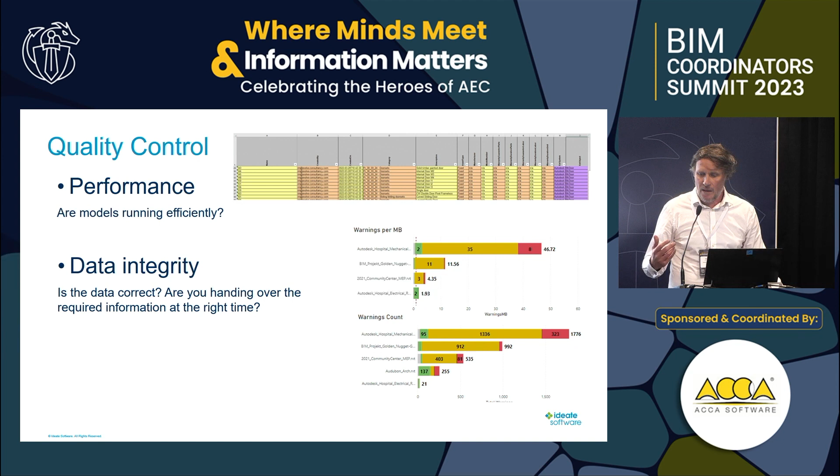So quality control, what we're looking at, I think we can define this into three specific areas really. So once we're looking at performance, are your models running efficiently? Are they delivering the work you need to deliver on time? Data integrity, now this is the important one for me. Are you delivering the correct data at the right time to your clients? And then finally, productivity. Are your users being productive? Are they producing the work they need to deliver on time, on budget, without overruns, etc.

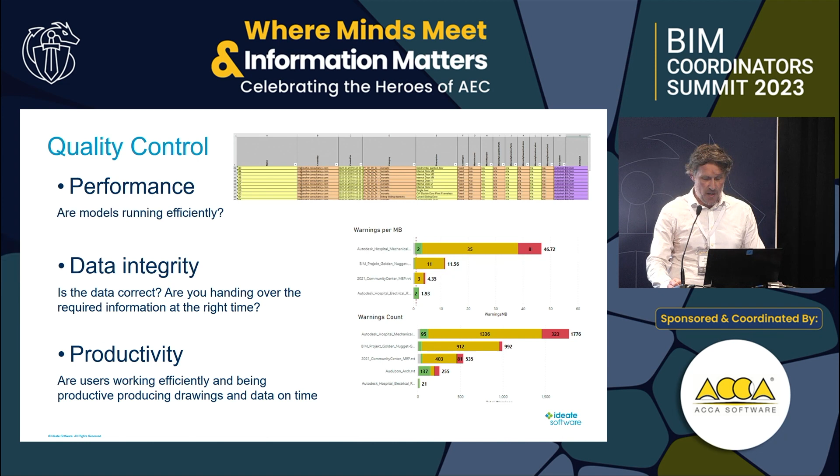So we can break these down into other areas here. So productivity, performance, what are we talking about here? We want to prevent issues with your models. We want your models to run as smooth as possible. You don't want your models crashing on a regular basis. That causes lots of delays, wasted time, even rework, etc. Do you want problems with saving your models? That's another issue. You don't want problems saving your data.

Printing and exporting, you do not want, when you come to print those drawings or produce those PDFs at the end of your project, issues there. And there's other issues that we can see on the board there. So incorrect data is the key one, as I mentioned before. You have got to make sure that the data you're promising to deliver is what you are delivering. So the goal here is we want to keep the project team and your project stakeholders happy.

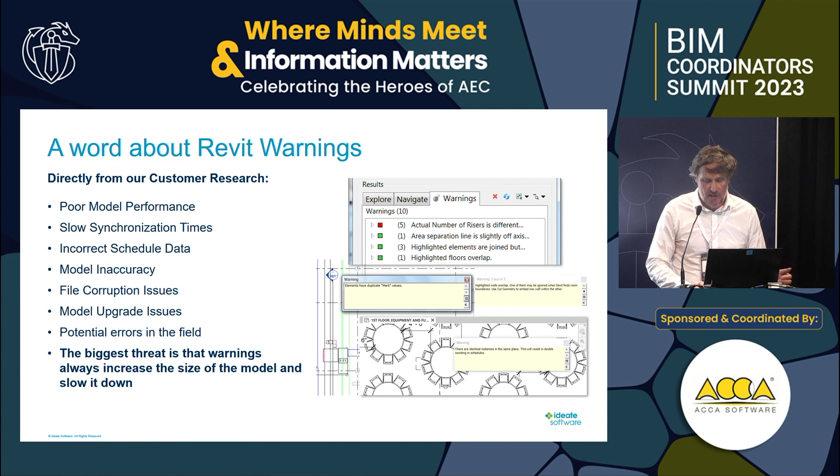So if you're ordering too many doors because your schedule from Revit is telling you need 300, but you only need 200, that's increased costs for materials, and it's also leading to waste as well. So if your scheduling is incorrect, that can lead to issues with site materials, etc.

And then I've put this one in, site safety. We know a lot of site inductions now have taken place virtually with a 3D model or one of those BIM caves, whatever they call them. If that model's wrong, then there's a potential for safety issues on site. So if that model is incorrect, that could also be a problem.

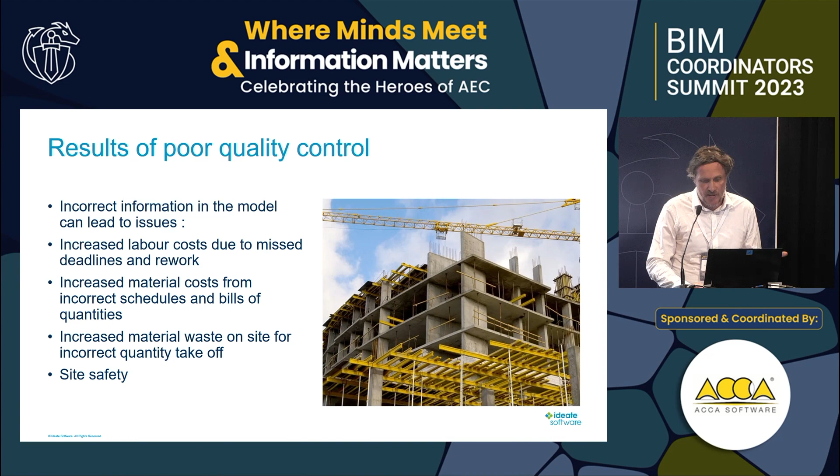So this is the data governance stage. So what's this got to do with data governance? Well, everything really. If your model doesn't contain the correct data, then you're going to be handing over incorrect data to your client at the end of the process. So how are you checking your information requirements? What are you doing to make sure that the information you deliver is what your client expects and requires?

So Ideate software, we've developed a suite of applications, and a lot of our tools can help with some of these issues around quality control. So I'm going to give you just one or two examples of how our tools can help with some of these processes.

So Ideate BIM Link is a solution to help you manage all of that data in your Revit files. You can export the data into Excel, which makes the process much easier for editing, managing that information, push that information back into your model, and it will update your model.

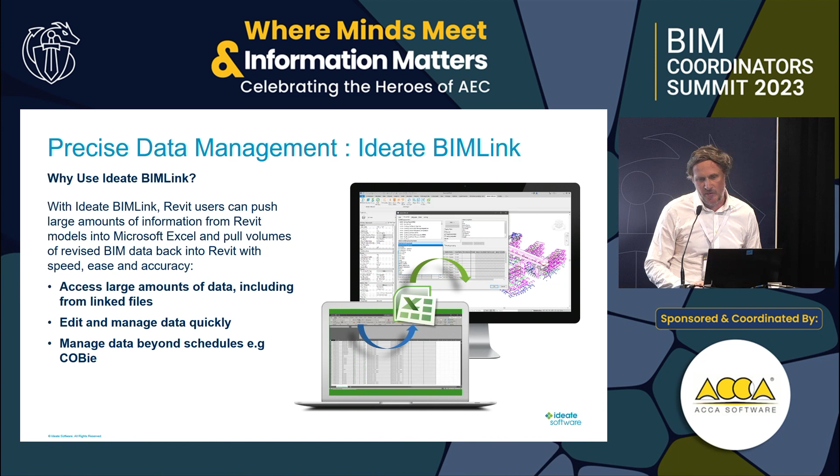One example of that is we have lots of pre-configured content, and we have content specifically for quality control. So this is checking naming conventions, it's checking standards, work sets, type names, you name it. There's a whole host of pre-configured content that we provide with our software to really help you make sure your models are correct and working to the best of their ability.

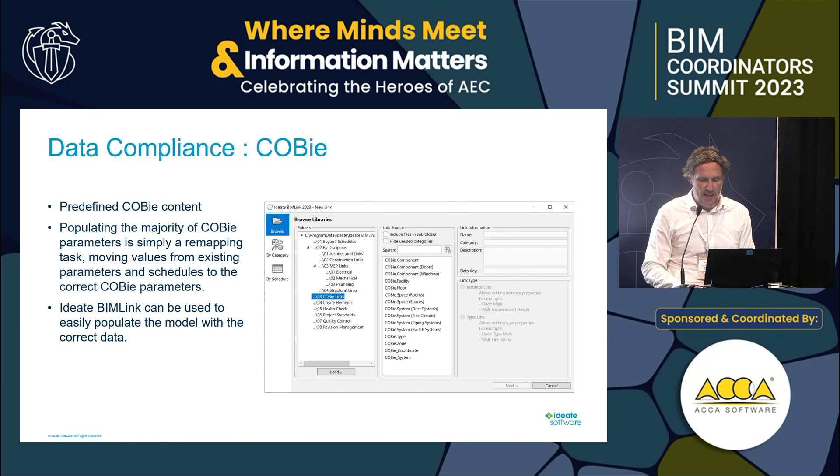And then COBie is obviously a key deliverable, especially with the ISO 19650. So again, we have got content to help you to manage this process. The vast majority of COBie deliverables, it's a mapping exercise—it's filling in properties in Excel spreadsheets, copying and pasting data from one cell to another, and then pushing that information back into your Revit model.

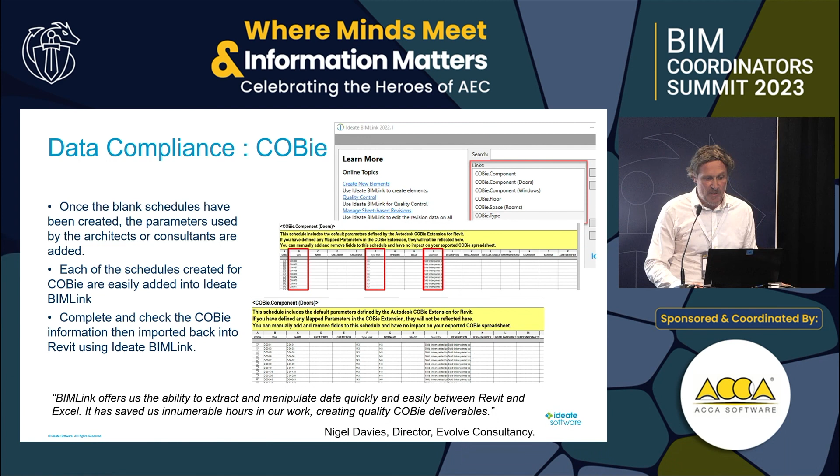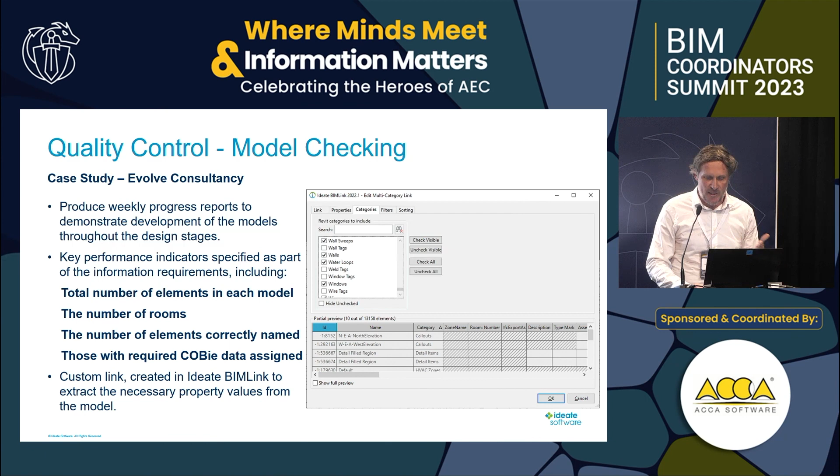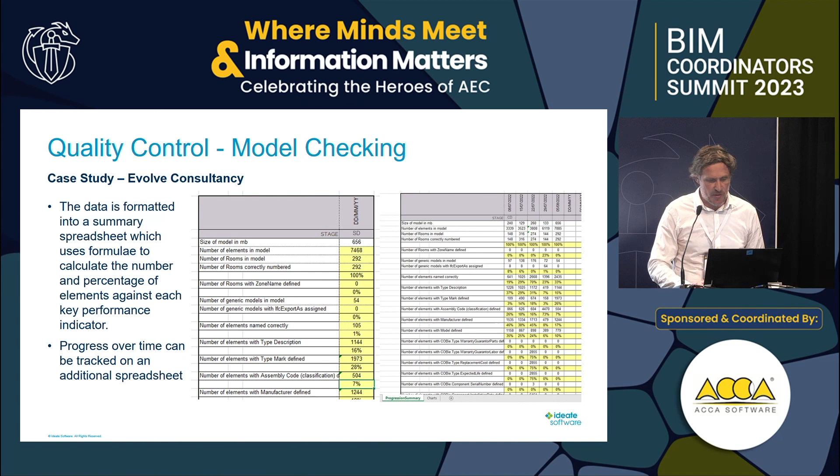So this is, again, from Evolve Consultancy. They were working on a project where they were asked to check the model performance and track the performance of those models throughout the delivery cycle of the process. So it's finding out key information like the number of rooms, are things being named correctly, is COBie being assigned to the projects. So once again, using BIMLink to extract the information from Revit and then manipulating that data within Excel, we provided a solution for them that helped them to track the progress of these models throughout the project lifecycle.

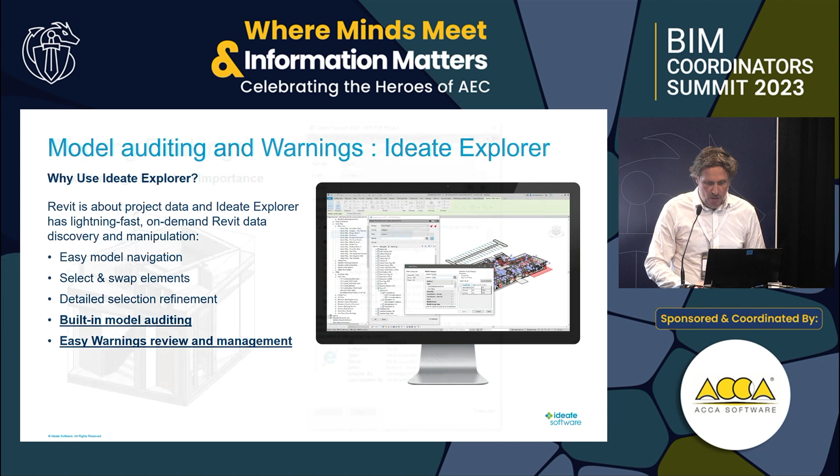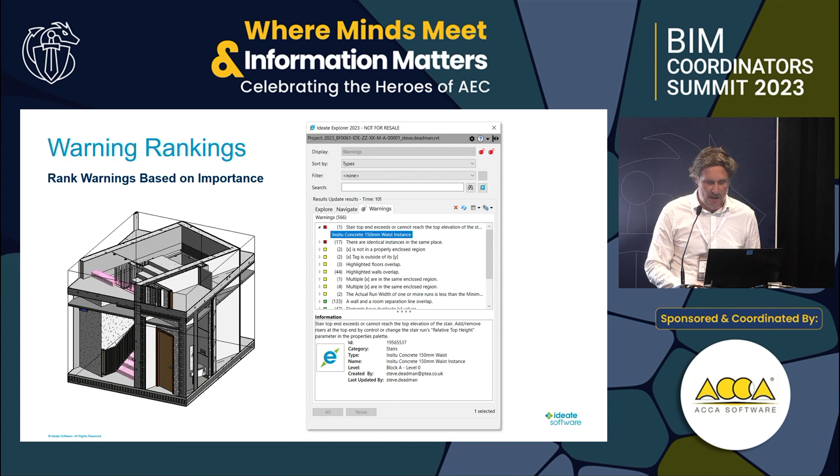So I mentioned warnings. Another one of our solutions, Ideate Explorer, has a built-in warning manager. This helps you determine which warnings are more important for you to deal with, rather than just having a long list of warnings that Revit gives you. We characterize these by how these warnings will affect the performance of your model, so this gives you an idea of how to track those warnings and resolve the ones which are more important. That's a solution we developed there.

Style Manager is a tool to help you manage the myriad of other data, so things like line styles, materials, line patterns, etc. These kinds of elements are very time-consuming to manage, or often impossible. With the Ideate Style Manager tool, we've given you the ability to analyze this data and then remove the unwanted styles and even merge similar styles together to make sure you can align with your project and BIM standards.

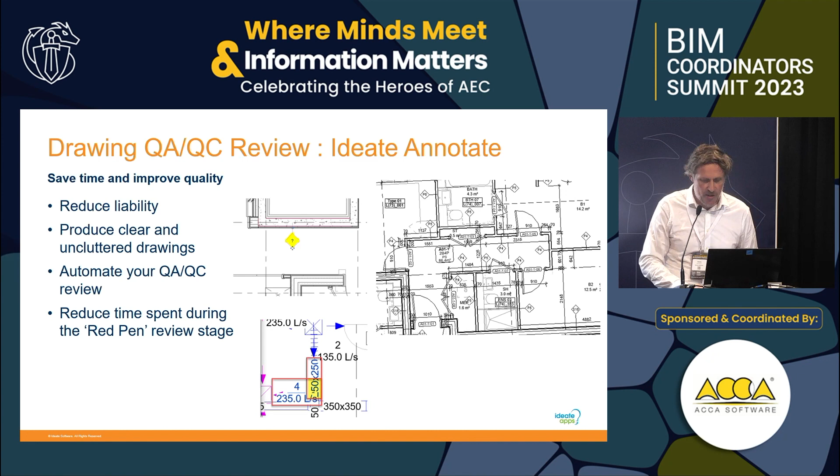And then finally, we have another solution here called Ideate Annotate. This is a tool that really does help with that QA, QC review of your project documents. You can run this solution and it will highlight issues with your document. It's that red pen stage, as I call it, where reviews are being done and project leads go around with a red pen marking up all these problems with your drawings. We can automate that process with Ideate Annotate, and it will help you resolve quickly any issues that the tool can highlight. These are some of the conditions that Ideate Annotate can pick up: 0-length dimensions, blank tags, duplicate tags, etc.

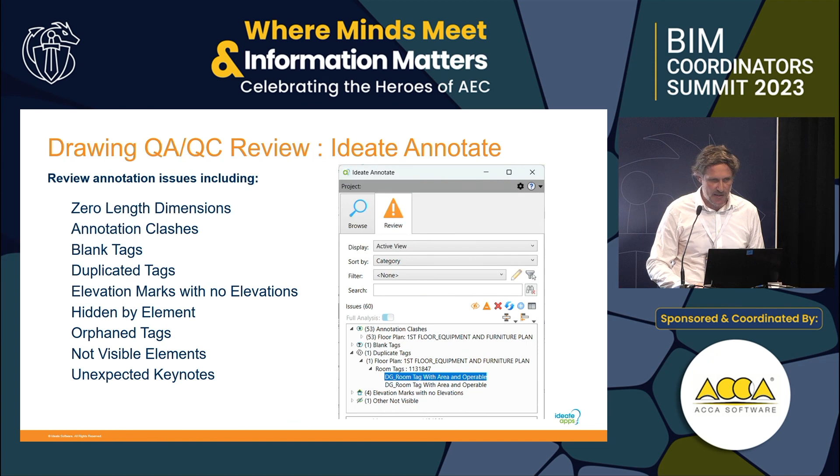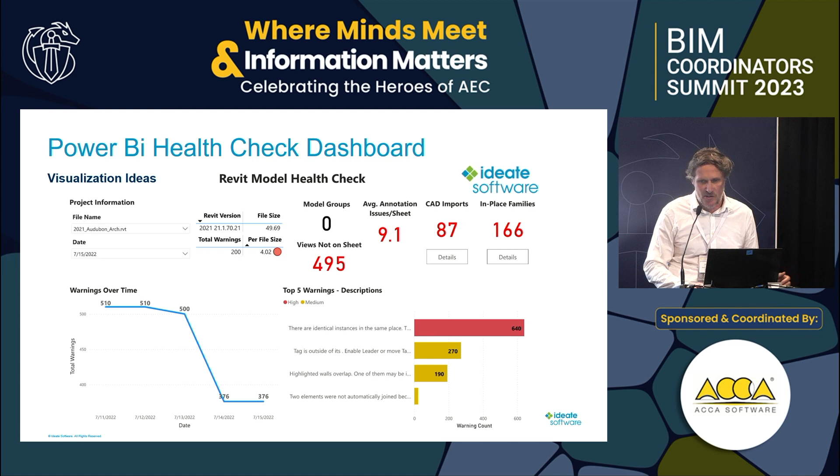And then finally, we have another solution to help automate these things further. Ideate Automation will enable you to schedule specific tasks, whether it's extracting data from your models, managing COBie information, creating PDFs and DWGs. We have another solution there to help with that process. That's just an example of some of the data that we can extract from these models to build a health check report. And who doesn't love a dashboard? We can push this information into a Power BI dashboard as well, so this process can be automated and scheduled, so you're extracting this information on a regular basis.

Model maintenance and quality is every team member's responsibility. Don't leave it to your BIM manager. It's everyone's responsibility to make sure that your models are performing correctly and the data that you are delivering from your models is correct and accurate. And hopefully with some of the Ideate software solutions, this should make that process easier and quicker for you.

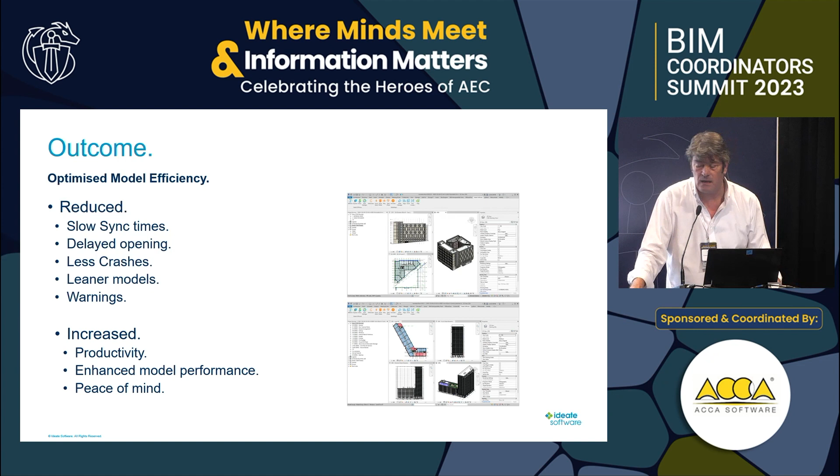However, if you've got all those things in balance and harmony, the outcome of that should be an optimized model efficiency. You shouldn't suffer from slow sync times, delayed openings, crashes. You should have leaner models, you should have fewer warnings, and that gives you increased productivity, enhanced model performance, and peace of mind within the company. The users get peace of mind that, I'm working on XYZ project today, I hope it doesn't crash.

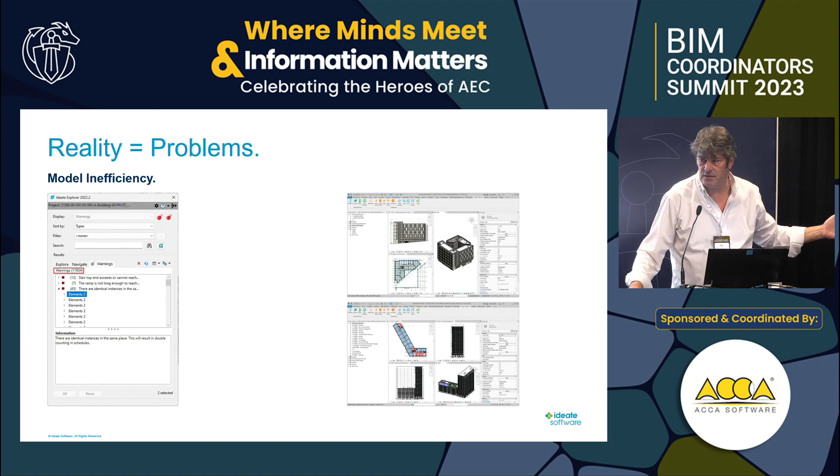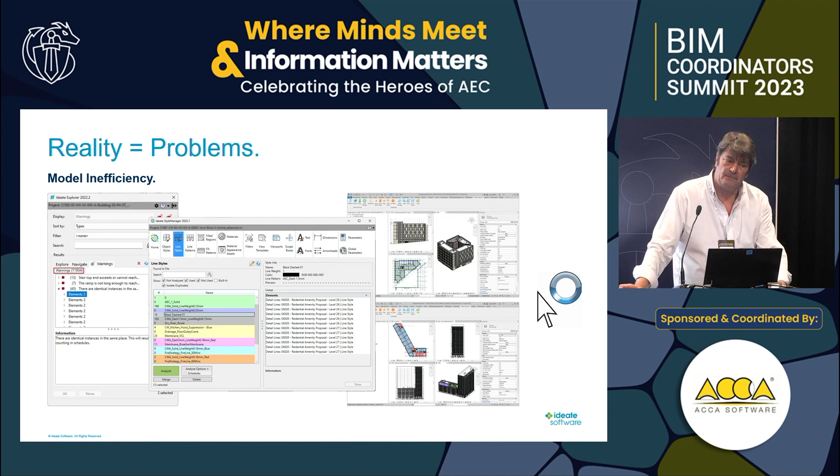You shouldn't have that many, or you're going to suffer from problems. If you're importing DWG or CAD data into your files, you're going to get more line styles, more patterns. All these things can result in the spinning blue donut of death.

What are the culprits of that? It doesn't matter how much time you give, you take people through mentoring processes and teach them model maintenance, there are things outside their scope that don't help. One of those things is deadlines. In today's environment, our deadlines are getting more and more compressed, the same amount of work, sometimes more, in a shorter space of time.

There's two ways you can handle that. You can throw more resource at it, which means you lose more money, or you can charge more money, in which case the client says we're not paying any more for it. That gives a compression on time, which affects the person doing the work.

And this person ends up spending hours and hours. To reduce the amount of hours they take, what do they do? I hate to say it, they'll take shortcuts. They'll do anything to get that package out on time.

And that is why we need Ideate, to make sure our models are well maintained. We bought the whole suite. I'd used it previously in other organizations to create success. In fact, there's one project I couldn't have completed without BIMLink for import and export of data.

It gives us a whole host of quick wins. With Ideate Explorer, it's like the Revit Project Explorer, but it's been on an Arnold Schwarzenegger course. It's a really beefy Explorer that lets you do a lot and optimize your models. It improves your audits, your QA.

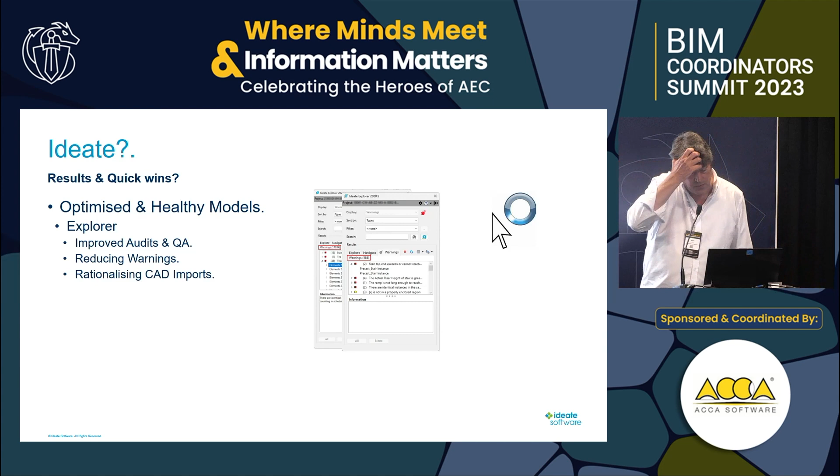You can reduce the warnings, you can see where those warnings are, you can rationalize your CAD imports. It just makes things better. There's that example I showed earlier on the first run through Explorer, where we reduced the warnings by over half in a very short space of time.

StyleManager has been absolutely invaluable for us. It's allowed us to do a lot of consolidation on some of our models and reduce line styles, patterns, text fonts. Does it matter that I've got all these line styles in a model file? Yeah, it does. They don't take up a lot of space, but they do take up space and cause confusion, and it's better to get rid of them.

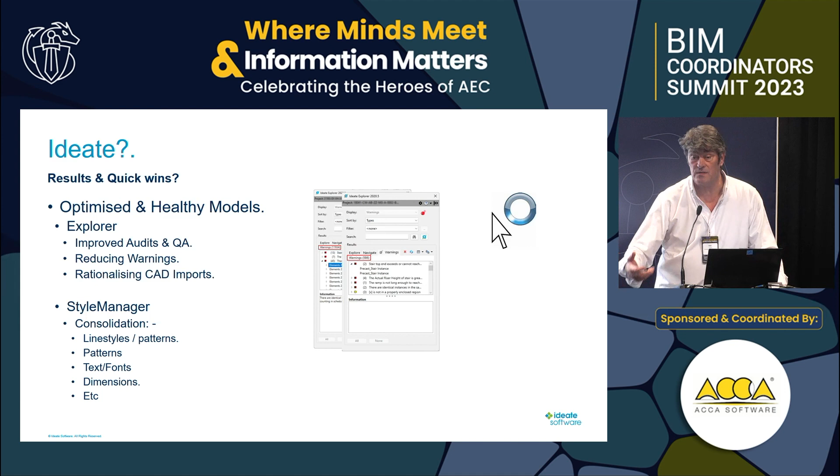It's going back to the old days of CAD when you deleted duplicates, people drew lines on top of lines. You've got to delete those lines because it keeps those files slim and efficient.

We've done some rudimentary analysis so far. We've had Ideate now, I think, 12 months. It's installed on every PC across the business. We've done workshops. The traction initially was a little slow, mainly down to deadlines and time constraints, but there's been a few studios that have really taken to it and used it to a great extent, and that's now rippling out across the business.

We've done a rudimentary extrapolation of return on investment, based on 60 users, 15 projects, working 46 weeks a year, and we reckon we can save those users 15 minutes a week. That's 15 hours a week, 690 hours a year, which equates to round about 30-odd K. So the software almost pays for itself, which is a great proposition.

The last thing I've got is a few quotes from my users, and the two I particularly like are the last two: Explorer helped us get a really unstable project back to a really healthy state, and, why isn't this in Revit as standard? I don't know, I don't work for Autodesk anymore.